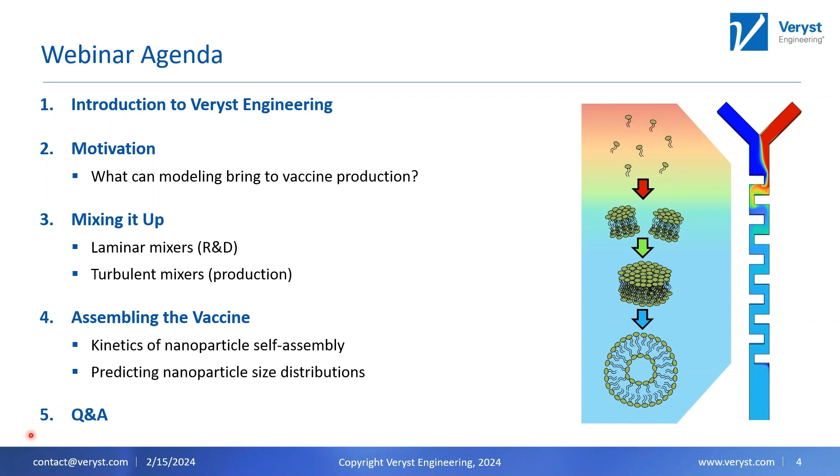Veryst Engineering is an engineering consulting firm based out of Boston, Massachusetts, although we have remote employees in both Miami and Houston. I'm actually remoting in from Miami. What we do is essentially provide consulting services to industrial partners all around the world on particularly challenging problems. We have a range of consultants that span a wide range of expertise to provide services in multi-physics simulation. We also do work in materials testing and modeling, as well as failure analysis. We're motivated and enthused by bringing the principles of physics, chemistry, and engineering to really challenging problems, and that's what distinguishes us as consultants.

My background is I'm a chemical engineer by training. I did my PhD at Stanford a number of years ago, did my postdoc at Santa Barbara following my PhD, and then have been with Veryst ever since. My background is in microscale flows, so flows on the microfluidic scale, as well as transport phenomena - that is heat and mass transfer, electrochemical transport and reactions, and also complex fluids, which includes non-Newtonian flows.

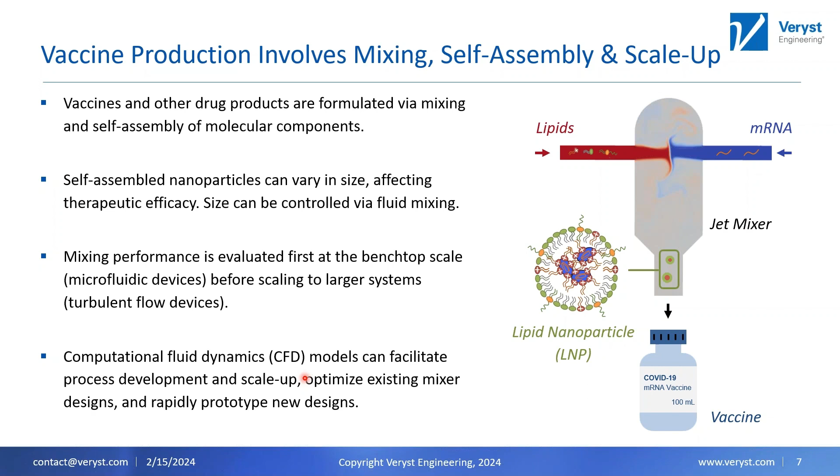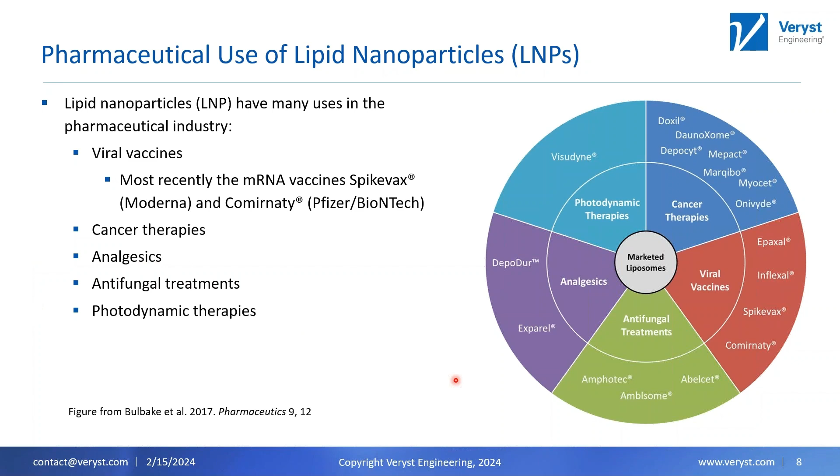In the case of the mRNA vaccine production process, the main outputs from a CFD simulation include mixing times and prediction of particle size distributions. Both of these are critical to product quality.

A second item, which is probably the most important, is developing a physical understanding of a process. In an experiment, you have control of the inputs and measurement of outputs, but in between, something happens, and that something is usually encased in a black box, immeasurable and unknown to the user. What CFD models bring is a window into that box, and you can get a physical understanding of the processes at play and how these processes compete.

For instance, how does the rate of fluid mixing compete with the kinetics of self-assembly? And which of these limits the production of lipid nanoparticles?

For an existing mixer design, you can use a CFD model to calibrate and optimize that mixer design without having to run a sequence of experiments, which may be expensive. You can perform sweeps of material and process parameters, even geometric parameters, to calibrate that mixer just right, so you know exactly what to perform in operation, or what process inputs to use in operation.

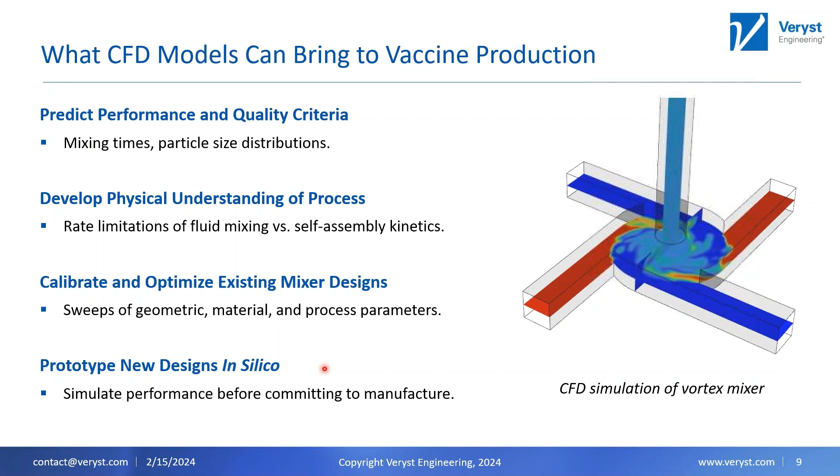At Veryst, we have a hierarchical approach to problem solving. Our motto is to start simple and build complexity in sequence. We don't like to start with a fully complex model. We like to develop some understanding before we get there, and typically that's how we'll work.

So when we're given a problem, whatever it is, we generally start with an ideation session. This involves hand drawings, dimensional analysis, scaling arguments, back of the envelope calculations, pen and paper calculations. A lot of times this can be enough.

Sometimes clients come to us and ask for a full CFD model, and we'll come back to them and say, hey, pen and paper calculations or semi-analytical models, reduced order models can actually get you 90% of the way there without having to do a fully sophisticated three-dimensional calculation, which can be time and labor intensive.

For many problems, of course, that's not the case. Sometimes the physics is so complex that you need a full-scale simulation. At that stage, we ask what scale of model is suitable to solve the problem? How will such a model be verified and validated? Is there corroborating experimental data to compare to? What are the important outcomes of a simulation?

As a trained simulator and theorist, my default position when I see a simulation is to not believe it until I see corroborating evidence.

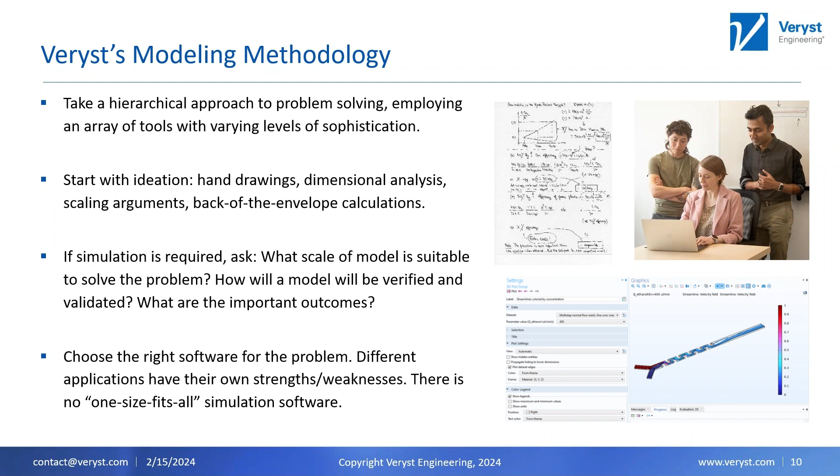Finally, as I mentioned at the top, we tend to be software agnostic. We like to choose the right software for the problem at hand, rather than having one hammer and trying to find a nail for that hammer. At Veryst, we're COMSOL certified consultants, but we also use ANSYS Fluent quite regularly for many of the problems that we solve. Each of these softwares has advantages. There is no one-size-fits-all software, so as a general rule, we try to use the software that's best suited for the CFD problem or any problem we're posed with.

Hopefully that gives some background as to the value of simulation and our hierarchical approach. In the next two sections of the talk, I want to focus on those two topics stated in the agenda, starting with the physics of fluid mixing and how it may be modeled.

Fluid mixing really comes in two variants: laminar mixing and turbulent flow mixing. In laminar mixing, what we're really looking at is the benchtop scale, the microfluidic scale. At these scales, mixing occurs by the random motion of molecular species.

This is molecular diffusion, and you can extract a characteristic diffusion time. The characteristic diffusion time typically is the length scale of interest—say, the effective diameter of a channel—squared, divided by the diffusivity, which is in units of meters squared per second, giving a time scale. The problem with the benchtop scale is that this diffusion time generally is prohibitively long. If you were to rely on molecular diffusion alone, you would need a very large device to achieve good mixing—that is, a homogeneous outlet for a heterogeneous mixture at the inlet.

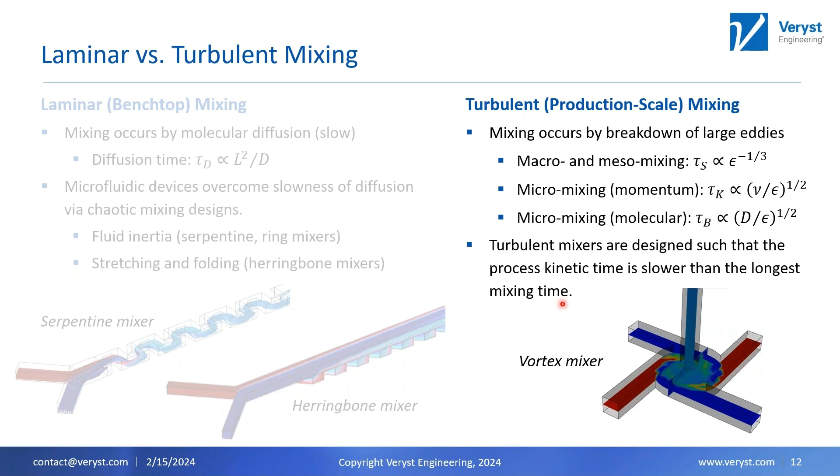When we approach any CFD model and we're trying to model a mixing process, what that essentially boils down to is coupling momentum conservation, or solving the Navier-Stokes equations, to mass conservation for each molecular species, in which you have an equation that governs their interdiffusion.

For anyone versed in computational fluid dynamics or fluid dynamics generally, the Navier-Stokes equations will be quite familiar, and this can come in both a turbulent framework and a laminar framework. The outputs of this calculation of momentum conservation is the pressure and velocity of the fluid without consideration of the particular species. Depending on if you have a laminar or turbulent flow problem, the solver you would use for solving the Navier-Stokes equations can be quite different.

These equations, which give the velocity and pressure, must be coupled to equations that govern conservation of mass for each species. You may have heard of Fick's law of diffusion, which governs the diffusive transport of species under dilute conditions.

For mixtures of very concentrated species, in this case water and ethanol mixed at relatively comparable mass fractions, you must use a more sophisticated set of equations, such as the Maxwell-Stefan equations, with a mixture averaging approximation for the mixture diffusivity. The key difference here is that the diffusion coefficient of the species will change depending on the local concentration, which we quantify via the organic or ethanol mass fraction.

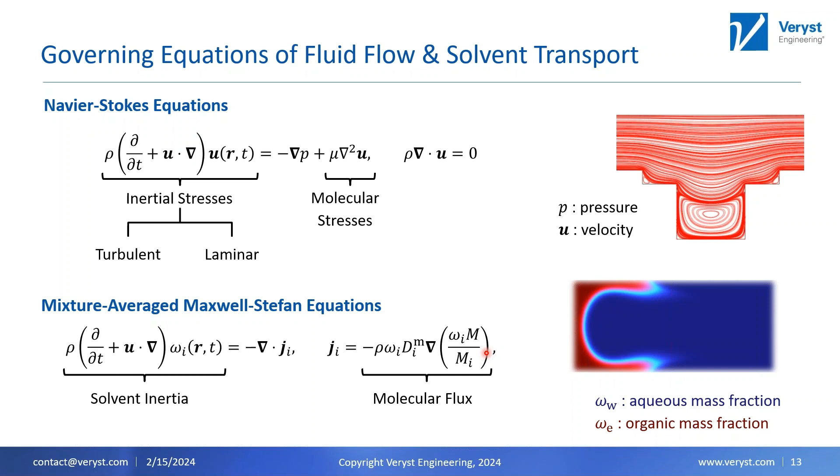So in the remainder of this section, I want to go through a number of different case studies, starting with several case studies for laminar flow mixers.

The challenge with laminar flow mixing is that diffusion is slow, and the goal is to achieve rapid, efficient mixing in a microfluidic device without relying solely on diffusion. The solution to that problem is chaos. Chaotic mixing, i.e. exponential stretching and folding of fluid streamlines, can dramatically enhance mixing beyond the diffusion limit.

I'm going to go over a number of different case studies in three prototypical devices that achieve this chaos in a number of ways. All of the simulations I will show here were done in COMSOL Multiphysics, and later in this section I'll also show some simulations using ANSYS Fluent.

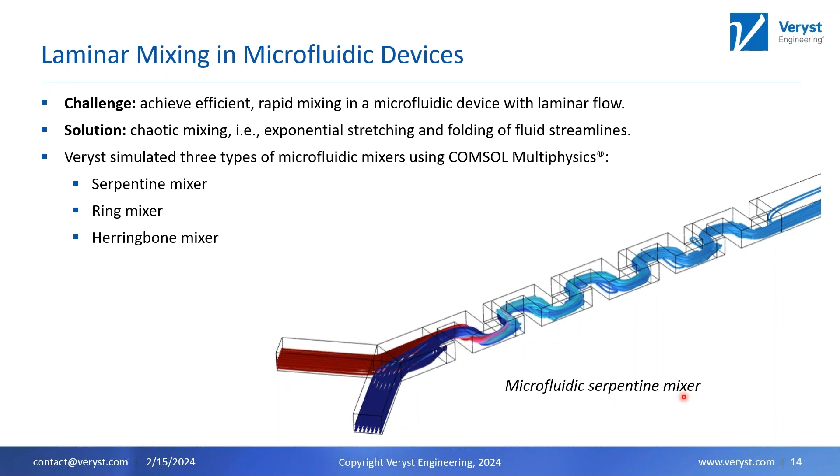I want to start with the microfluidic serpentine mixer, which is depicted on the right. What we have here is water being fed in on one channel in blue and ethanol in the other channel, and the eddies are visualized by the streamlines.

As these two streams feed into this channel, they bombard the walls of these S-shaped baffles. So the serpentine micromixer gets its name from these S-shaped baffles, and there are 5 in a row here. After each baffle, I've taken a cross section and plotted the ethanol concentration, where red is 100% ethanol and dark blue is 100% water. You can see as you traverse down the channel, after 5 S-shaped baffles, the mixture goes from being quite heterogeneous to entirely homogeneous. This is achieved through the bombardment, the collision events between the fluid streamlines and these S-shaped baffles as it has to make successive turns.

This effect relies on fluid inertia. The Reynolds number, the characteristic dimensionless group that compares inertial forces to viscous forces, is much larger than 1 in this scenario. The flow is still laminar, so I want to be clear here: the Reynolds number is not large enough to induce a laminar to turbulent transition, but it is large enough to exploit fluid inertia. When you do exploit fluid inertia, mixing is dramatically enhanced above the diffusion limit.

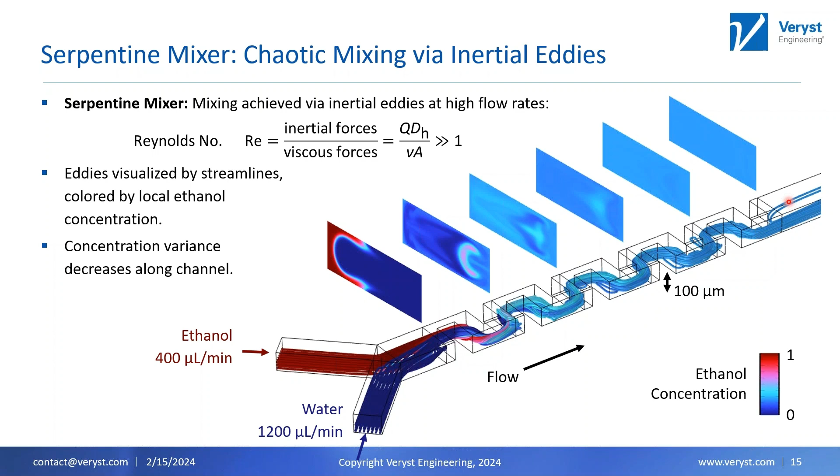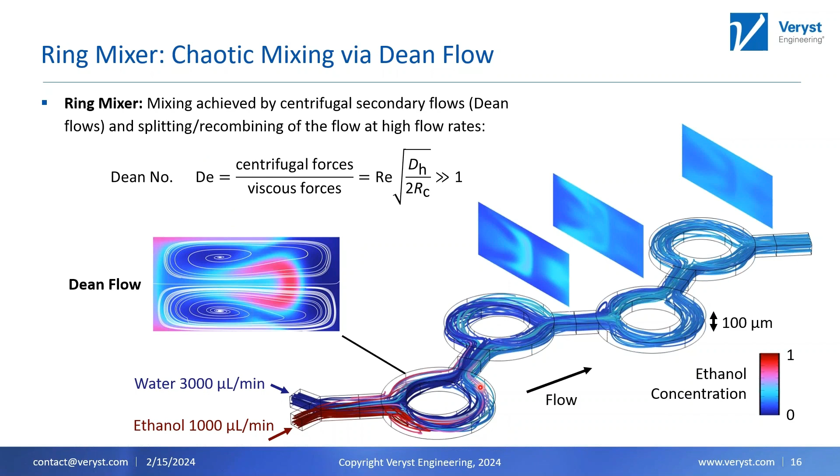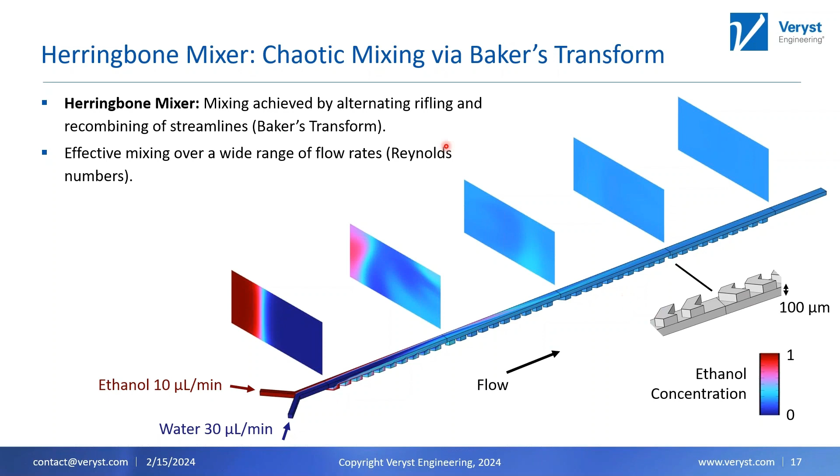The last example I want to bring up for laminar flow is the herringbone mixer. This device does not require fluid inertia to mix. The flow rates shown here are much smaller than in the previous two examples, yet with not much channel length, you achieve very good fluid mixing. How is this done? The unique design requires a bit more manufacturing than the previous two geometries—rather than a single level device, this is really a two-level device, with grooves that have an alternating herringbone pattern. These grooves facilitate mixing by stretching and folding streamlines, a process called the Baker's transform.

The Baker's transform works essentially as an analogy to what bread makers use—if you've ever worked with dough, you stretch and fold it until it becomes homogeneous. If you zoom into the fluid streamlines in this herringbone device, it works exactly the same way. Each groove causes the fluid streamlines to dip and rise, and that process, if you look at a cross section, actually stretches and folds the streamlines so the distance between fluid lamella shrinks. The distance over which molecules have to hop from one streamline to another becomes much shorter. Again, this doesn't require fluid inertia, which is remarkable.

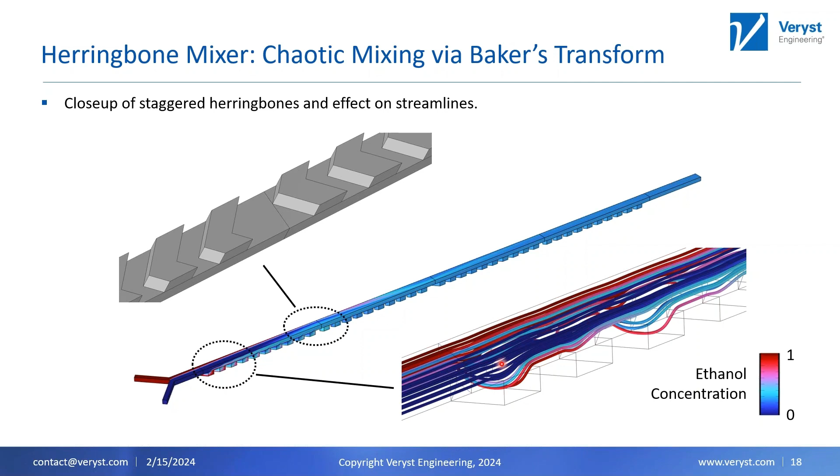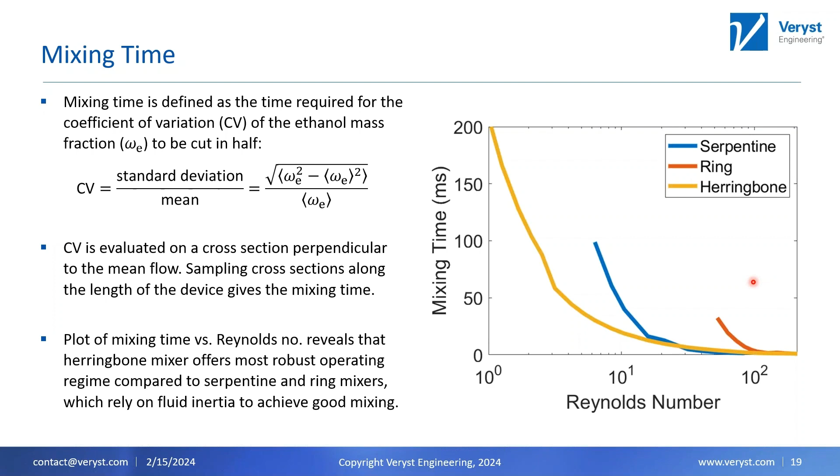Turbulent flow mixers are designed to achieve rapid mixing at large flow rates. We'll show an example focusing on this confined impinging jet mixer of the different mixing time scales in this device, and which one ends up being rate limiting.

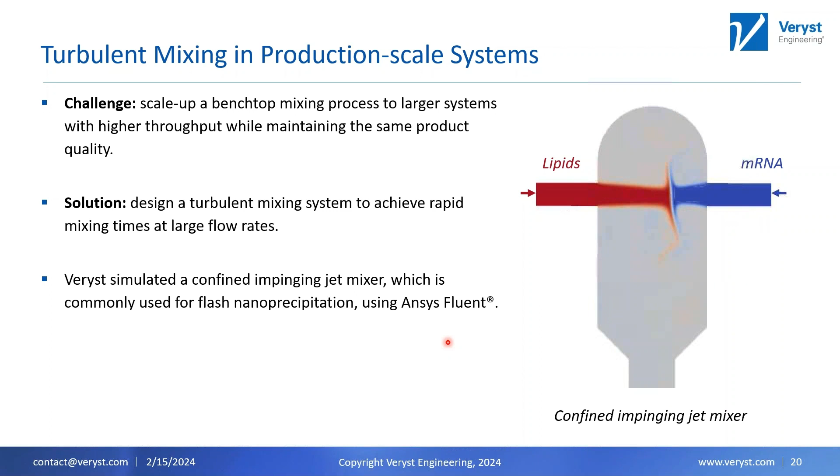So if you'll recall, there are three important scales that matter: the macro scale, the meso scale, and the micro scale. This image on the right really highlights those scales.

The macro mixing scale is really at the scale of the vessel. It's intuitive to think about a stirred tank with impellers that through bulk convection convect the fluid. That's the macro mixing scale.

The meso mixing scale is at the scale of the eddies. The vortex shedding that occurs via the turbulence energy cascade gives rise to a mixing time at the meso scale. A good rule of thumb is that the characteristic size for these eddies is related to a characteristic dimension of the device, in this case the inlet channel diameter, which gives you a characteristic size for these eddies.

Once those eddies have dissipated and you get down to the scale of the molecules themselves, the intrinsic viscosity and molecular diffusive processes that occur at those scales govern the micro mixing.

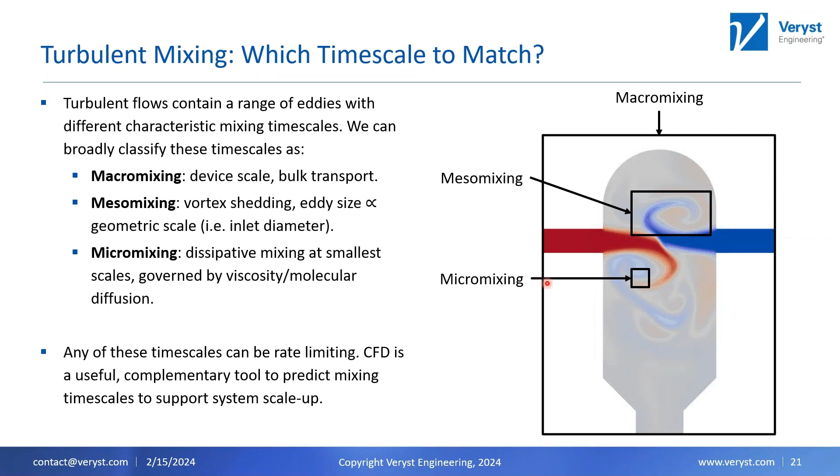Any of these time scales can be rate limiting. Typically, in most devices, the meso and micro mixing time scales are rate limiting. CFD provides a complementary tool to experimental iteration and design to calculate these time scales and see what dictates the mixing rate in any given device.

This plot really hammers home in a quantitative way what I discussed on the previous slide. This is the confined impinging jet mixer, and I've colored in blue the regions of the mixer that are meso mixing limited, and in red the regions that are micromixing limited.

The way I do this is I calculate two mixing times. The micromixing time is at the smallest scales. This delta here is a subgrid scale; in a large eddy simulation, it's the filter width. You divide this by an effective diffusion coefficient, a combination of the turbulent diffusivity and the molecular diffusivity. The square of this length scale divided by that quantity gives a micromixing time scale.

At the mesoscale, you have the vortex shedding that occurs as these eddies break down, and that vortex shedding gives rise to bulk gradients in ethanol concentration, and that characteristic variation in ethanol concentration defines the mesomixing scale.

What you see from the plot is that the inlet channels where the eddies emerge, in this region of the impingement zone, mesomixing is the dominant rate-limiting mechanism, as well as near the walls. In the bulk of the channel, though, micromixing ends up being the dominant rate-limiting mechanism in the confined impinging jet mixer.

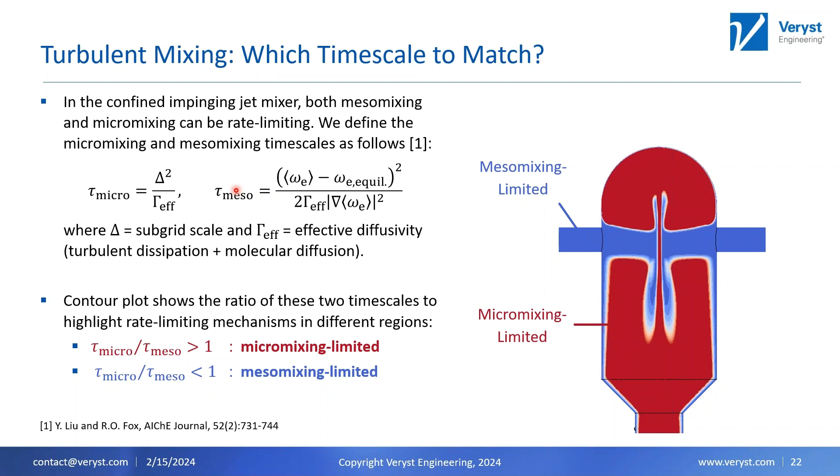We can sum these two time scales to get a total mixing time, and when we're interested in quantifying device operation over a range of flow rates, we can take the sum of those mixing times and plot versus the Reynolds number, similar to what we did for the laminar mixing device.

What you see is that even at very low Reynolds numbers—100 is very low for turbulent flow, though not for laminar flow—the mixing time is pretty fast, less than 20 milliseconds, and it gets even smaller as you increase the Reynolds number.

This just goes to show how tuning the flow and enhancing the turbulence of your process gives rise to much faster mixing times than could ever be achieved in a laminar mixing device.

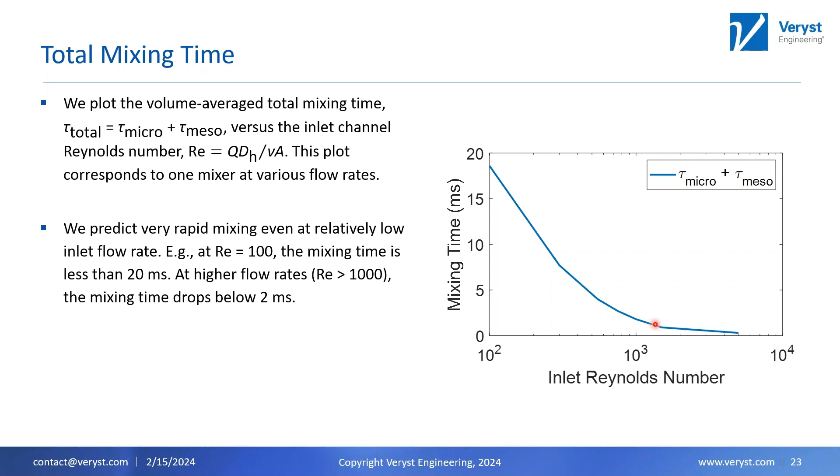This summarizes this section of the talk on fluid mixing. The main takeaways are that industrial drug manufacturing relies on mixing of different components between multiple fluid streams, and the key challenge is scaling up from the benchtop scale to the production scale.

At the benchtop scale, you're limited by diffusion, and there are a number of ways you can get around that using inertia or via the Baker's transform.

At the turbulent scale, the challenge is that different physical mechanisms can actually limit your mixing, and these are very device dependent. We showed one example, the confined impinging jet mixer, because that's the industry standard for mRNA vaccine production.

We've also simulated other mixer types such as T mixers and multi-inlet vortex mixers, and so on, and these devices all bring interesting nuances to the problem. For instance, in the confined impinging jet mixer, we showed that most of the device is micromixing limited with some mesomixing at the walls.

In the T mixer, micromixing is dominant and there's very little mesomixing at all. In the multi-inlet vortex mixer, you have a combination of both meso and microscale mixing. These devices also have the added advantage compared to the confined impinging jet mixer of not requiring matched momenta of the two inlet streams. If you recall, that stagnation zone is stable or quasi-stable only by virtue of the matched momenta of the inlet streams in the confined impinging jet mixer.

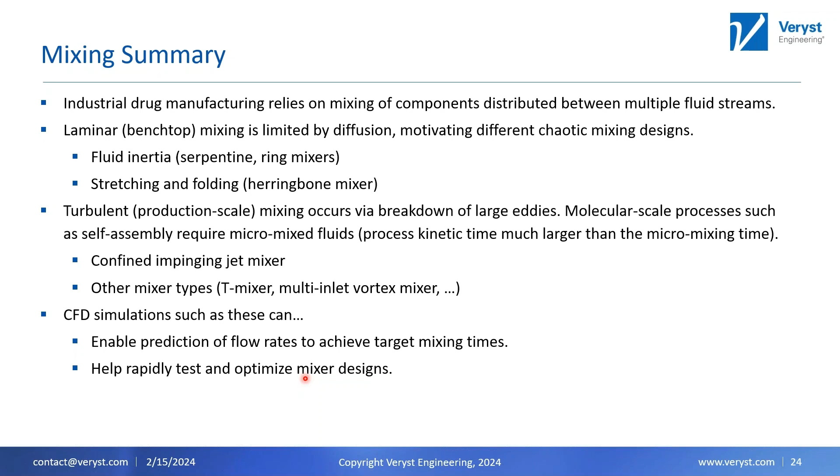So I want to end, this is the last section of the talk, and I want to bring in now the kinetics of self-assembly and how that may be incorporated into a CFD model.

What I'm showing here, similar to the first slide, is a prototypical mRNA vaccine formulation. You have mixing of two inlet streams, an organic stream and an aqueous stream. The aqueous stream solubilizes the mRNA, whereas the organic stream, such as ethanol, solubilizes the lipids. As they mix and self-assemble spontaneously, they form these lipid nanoparticles.

This is a very complicated process. There's many different components here, and I'm only giving a very simplified snapshot. There's actually many, many components in any given formulation, and each has a job. For instance, the ionizable lipids are necessary to neutralize the charge of the mRNA. They effectively encapsulate the mRNA, whereas the neutral lipids and pegylated lipids provide a core outer shell. The pegylated lipids are necessary to increase biocompatibility of these nanoparticles and also control their size.

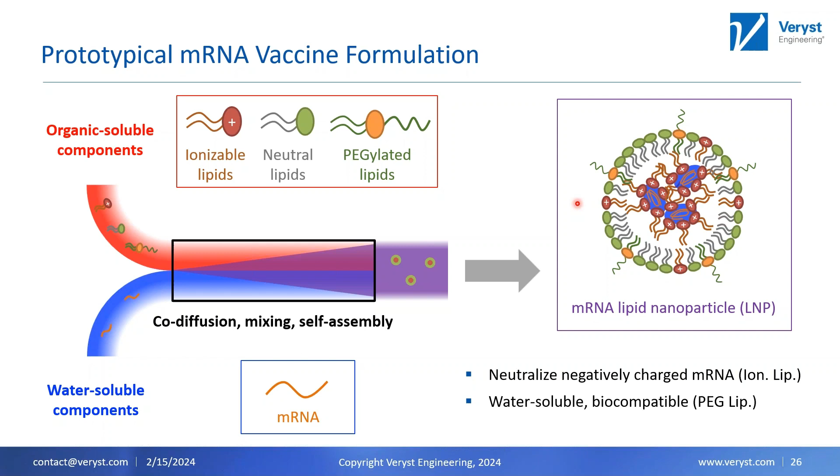This is very complicated, and I cannot stress this enough. The key thing with modeling is to try and take a complicated process such as this and recognize how I can simplify it to extract the key physics and key outcomes that I want, without compromising the essence of the self-assembly process.

Why would we want to do this? Why does this matter? At the beginning of this talk, I mentioned that delivery efficacy is really sensitive to lipid nanoparticle size. This plot from a paper I extracted from the literature really emphasizes that.

This is a case where the in vitro activity of siRNA lipid nanoparticles was quantified via gene expression for different nanoparticles with different amounts of pegylated lipids. As you increase the pegylation content, the size of the lipid nanoparticles drops from 67 nanometers to 37 nanometers. What you see as you decrease the size is that the activity of those lipid nanoparticles increases. In other words, smaller lipid nanoparticles more readily penetrate tissue to deliver mRNA or siRNA in this case.

This is a general heuristic: smaller sizes can more efficiently penetrate. This is important because mRNA vaccine delivery typically exhibits low yield. It's really important to deluge a patient with a large dose in order to extract the therapeutic outcome you want. As I mentioned at the beginning of this talk, those size populations can be controlled by controlling the mixing time. In general, longer mixing times give rise to larger aggregates and more heterogeneous lipid nanoparticles, while shorter mixing times give rise to smaller particles and higher yield.

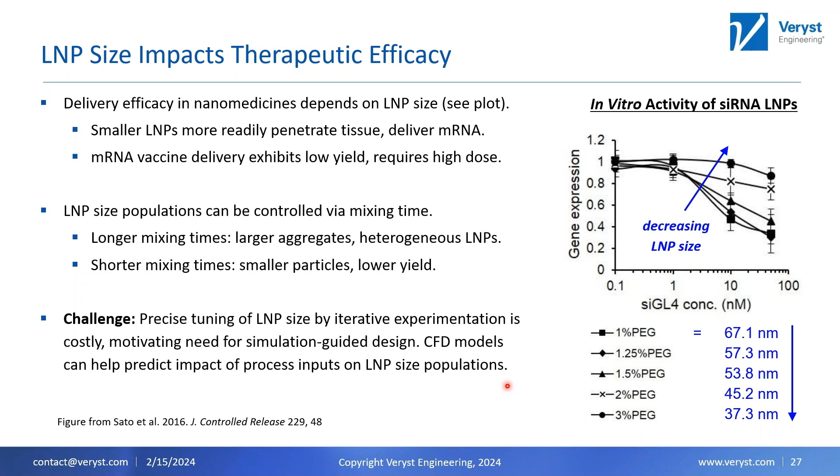Now, to do that is challenging. So what I'm going to show today is a very simplified model for lipid nanoparticle self-assembly. If you recall, a traditional vaccine formulation has many, many components. What I'm going to show you today is what happens when you break that down to even one component: that of vesicle self-assembly, the self-assembly of monomeric lipids into a bilayer aggregate structure called a vesicle.

This process is well characterized. It's been studied for decades and decades. What basically happens is that monomeric lipids first nucleate these small bilayer sheets, which can be approximated as discs, which are pretty small typically upon nucleation. Those bilayer discs then grow via binary collision events or aggregation, causing the sheets to grow and grow until eventually they grow large enough that they will close.

The closure occurs because as they grow, there's a competition between the bending energy for curving the sheet and the edge energy, the penalty that's paid for there being free lipids at the edge. Beyond a critical size, they'll want to close, and that process is stochastic. There's some thermal fluctuations in here, and that stochasticity gives rise to a size population.

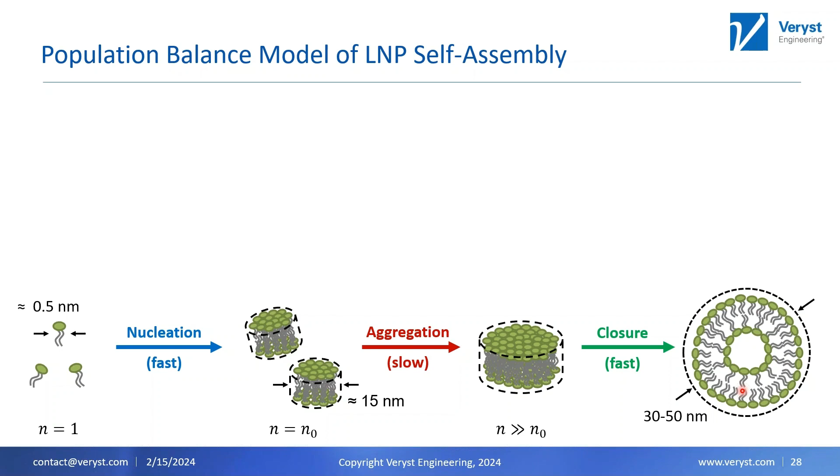Each of these processes can be modeled using the population balance equation. This is an equation that finds many uses in the pharmaceutical industry, ranging from bubble column reactors to polymerization and crystallization and many other technologies and applications. I'm going to be using it here to model this process.

So this is basically a transport equation for the aggregate distribution function that varies in space and time, and also varies by the number of lipids per aggregate. Each of these number of lipids per aggregate can be binned, and that dictates a binning of the aggregate size. Each of these steps in this process corresponds to a term at the right-hand side of this population balance equation.

The fast nucleation occurs at a typical nucleus size. Aggregation through these integral terms in the population balance equation gives rise to birth and deaths of new aggregates until finally they close, and that closure prevents them from growing any further.

To simplify the problem even further, we're going to focus only on the aggregation step. We're going to assume that aggregation is the rate limiting step, as it is typically the slow step in lipid nanoparticle self-assembly. And that aggregation of bilayer sheets into larger sheets will be quantified via these integral terms in our population balance model.

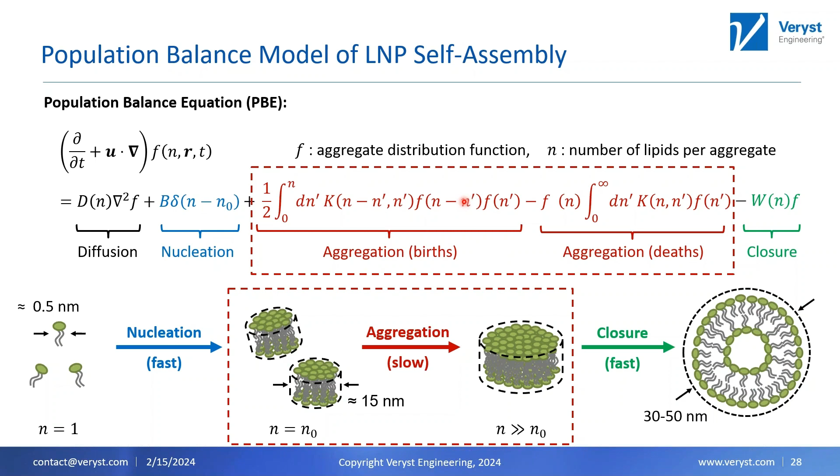So we implement this model using ANSYS Fluent for the serpentine micromixer that I showed on a previous slide. We simulated vesicle self-assembly at flow rates, or at Reynolds numbers rather, ranging from 20 to 100. So we are exploiting inertia here.

So the lipids are distributed in the ethanol. They rapidly precipitate out nuclei or bilayer disks that subsequently aggregate as they progress down the channel. We assume that aggregation is the rate limiting step, so we neglect the fast processes of nucleation and closure, but rather only focus on what aggregation does to the size population of these bilayer sheets.

And we're going to study this as a function of two process inputs: the total flow rate, which is the sum of the flow rates of these two streams, and the flow rate ratio, which is the ratio of the flow rates of these two streams. These are the typical process inputs that are used to control mixing at the benchtop scale.

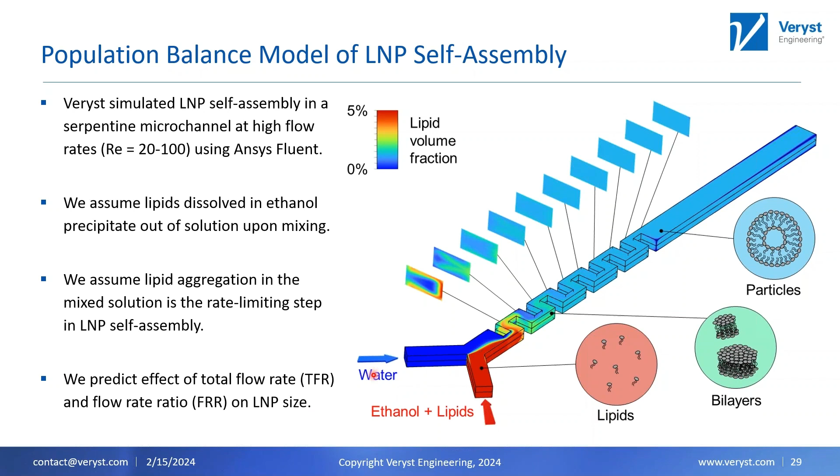So here's a sample of what our model can predict. Lipids are fed in the ethanol stream, and I've colored the ethanol mass fraction on the top here. I've sampled at different cross sections what the particle size distribution looks like at various points down the channel. At the inlet, you see you have a monomodal, sharply peaked distribution. That makes sense. Upon mixing, lipids rapidly precipitate out to form nuclei of a pretty narrow size range.

As time progresses and these bilayer disks collide through these binary collision events, they'll grow and the size population broadens to larger and larger particle diameters. The number fraction of any given bin of size goes down, but the total mass is conserved here, and so the distribution effectively broadens. You get a fewer number of larger aggregates, but those aggregates are distributed.

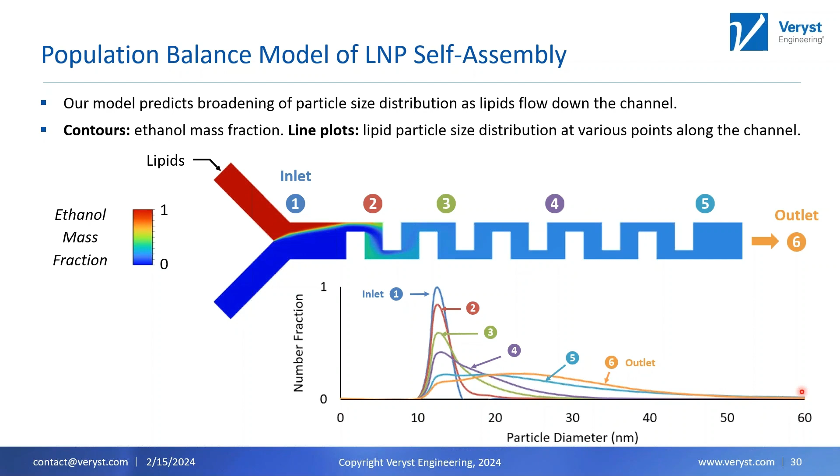Why does this happen? One might intuitively think that if you increase the total flow rate, i.e. exploit more fluid inertia, you get better mixing, and so you should get larger particles.

But as it turns out, when you increase the total flow rate, you're also decreasing the residence time for lipid aggregation. You're essentially not allowing any opportunity for these bilayer disks that have nucleated to find each other, collide, and aggregate into larger aggregates. That ends up dominating, and that's what actually causes the smaller aggregates at the outlet for the higher flow rates.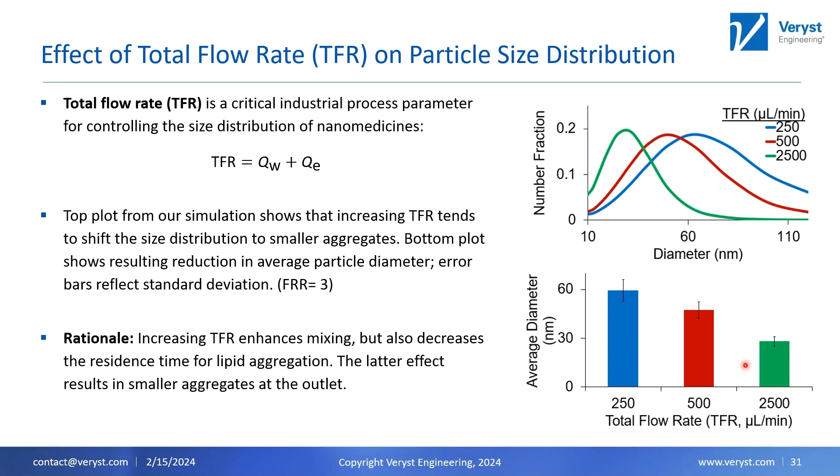Now, if I instead keep the total flow rate fixed, but only change the ratio of water to ethanol, that's the flow rate ratio, we can also quantify how that impacts the size distribution.

Why does this occur? The main reason is that you've essentially diluted the system here. You've diluted the overall concentration of lipids and therefore aggregates. Binary aggregation is a concentration-squared event.

In other words, the rate of aggregation scales with the square of concentration of those aggregates. So if you've diluted down the entire system, you're essentially slowing the rate of aggregation, and that effect results in smaller aggregates at the outlet, or smaller lipid nanoparticles.

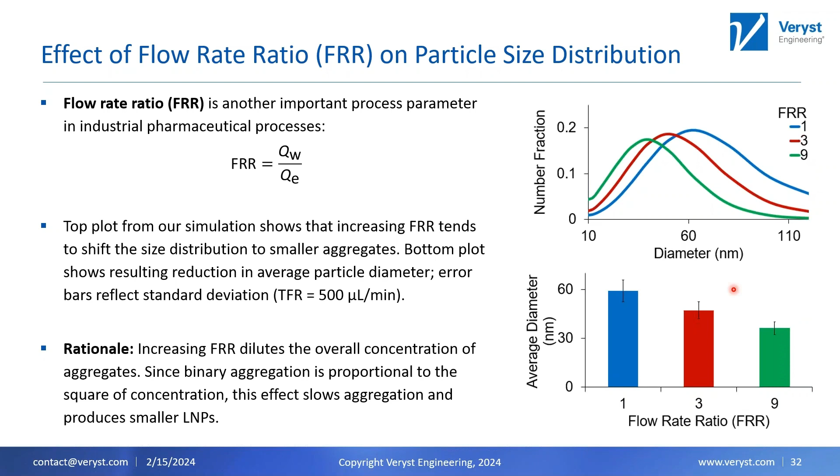This is somewhat reassuring that even though we have a very simple model, where we've only considered aggregation amongst bilayer fragments, even that model qualitatively reproduces the same physics that is seen in experiment.

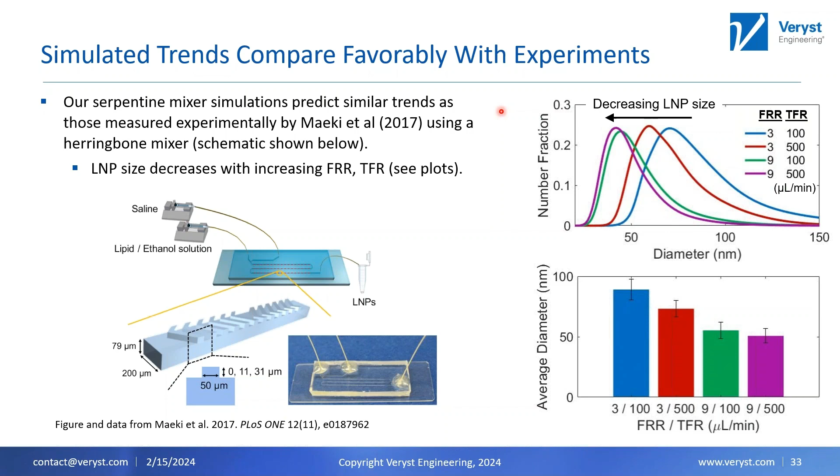And so this summarizes the second section of my talk. Lipid nanoparticles have many uses in the pharmaceutical industry, including mRNA vaccines, and what's really critical is lipid nanoparticle size. It's of interest to predict and tune a process to achieve a target size distribution.

That can be achieved using the population balance equation. We showed a very simple model where we only coupled convection and aggregation, being the rate-limiting step of self-assembly. Our ANSYS Fluent model predicts that increasing the total flow rate or flow rate ratio results in smaller nanoparticles with a much tighter size distribution.

That result is supported by experimental evidence in the literature. And so when you're scaling up, we showed an example from the benchtop, and to scale that up to the production scale, it's very important to have a good handle on the kinetics of your process.

Knowing the process kinetic time is key in CFD simulations to scale up a process from the benchtop scale, where laminar flow and deterministic streamlines are at play, to the turbulent flow scale where you have stochastic streamlines, fluctuations, much more chaotic flow patterns.

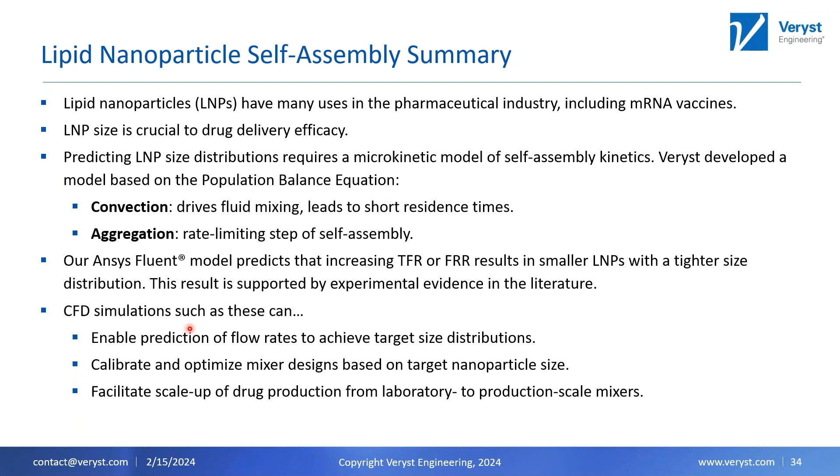To have confidence in those models means you have to have confidence in the kinetics of your process. And so hopefully I've given you some insight into how CFD simulations can help with development.